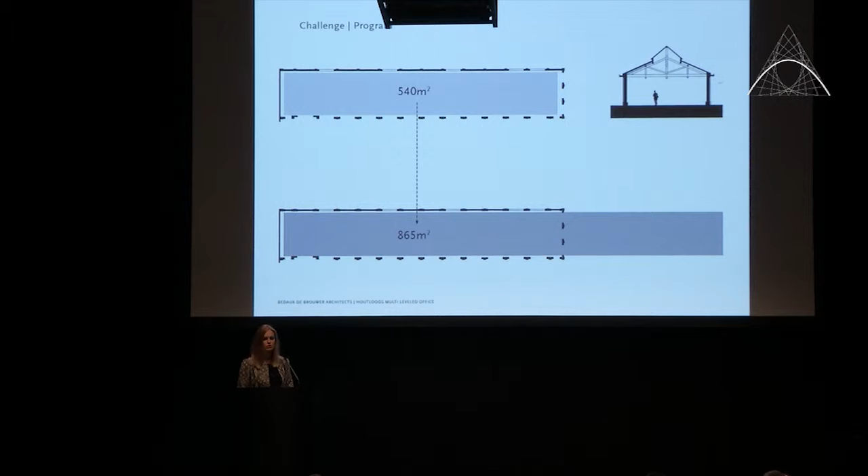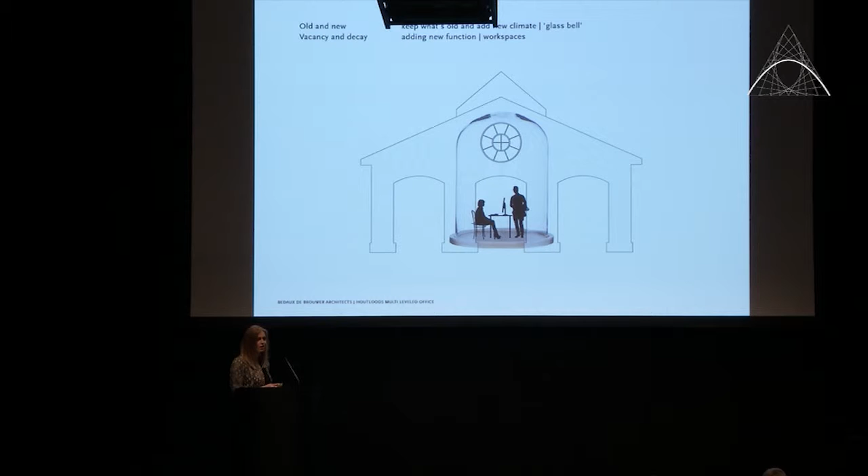So we have an old construction, this old building. How do we cope with all these challenges? Well, it's actually quite simple in a way. We add a new climate to it, like we put a glass bell into it, detached from this historical skin. Therefore, what is old, we keep old, and what we add new, we add as a new climate. Secondly, we add new functions into this new climate, into this glass bell, so to say. And then by stacking the program in a clever way, we try to come up with the program which the client asked for.

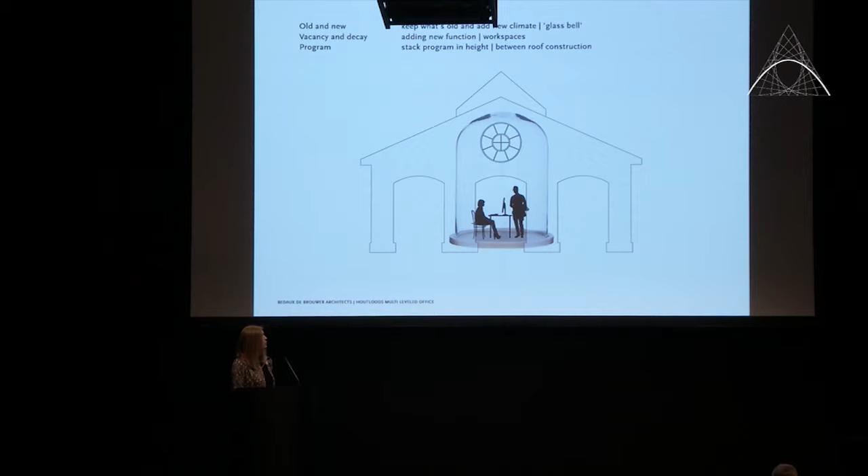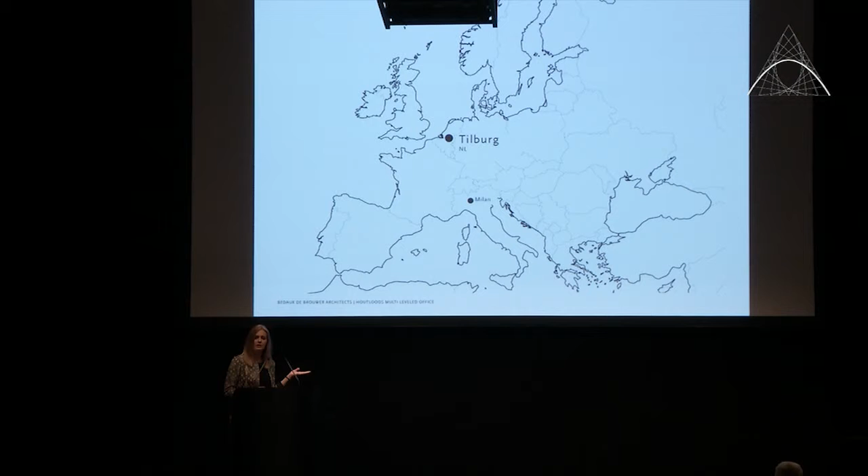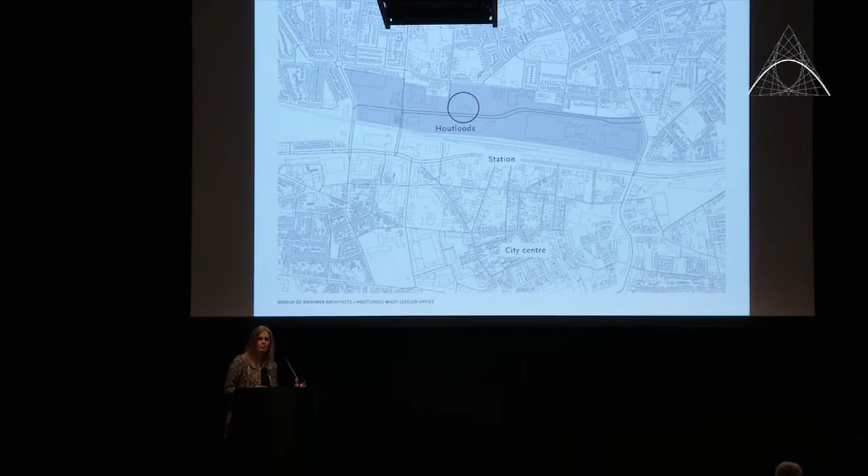So I first want to tell you a bit more about the urban context, because it's very important for this design. Like I mentioned previously, the building is situated in Tilburg, which is in the southern part of the Netherlands. If we zoom in on the city, you see in blue the old industrial area. Here, the Dutch railroad company had their workspace for the train station. It's near the station, which is still there, and very near the city center. So it's very central in Tilburg.

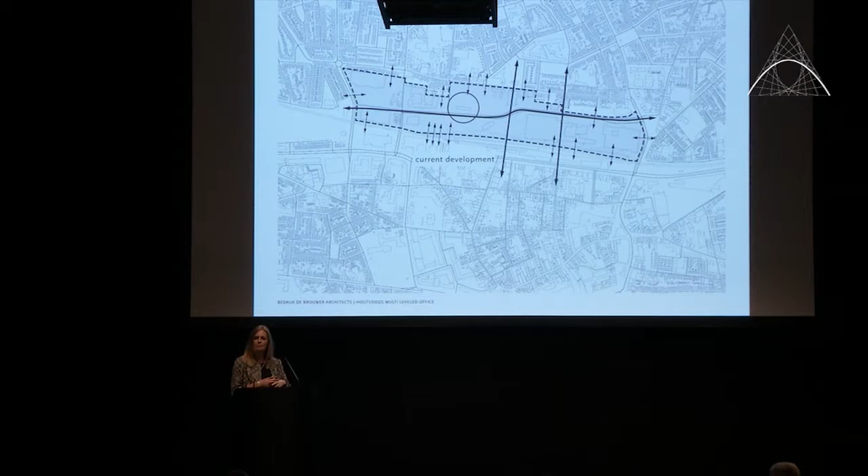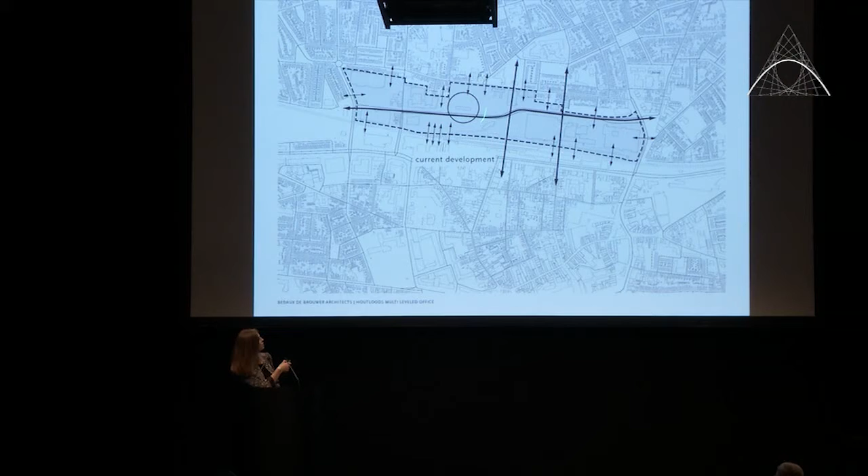But actually, for more than 150 years, the whole area has been closed off. So it's been a kind of forbidden area of the city. At this moment, they are opening up the borders, and they want to reconnect it to the inner city again. This transformation is actually the biggest development of this city in history. And as you can see over here, in the middle is the Houtloods, really in the heart of this urban development.

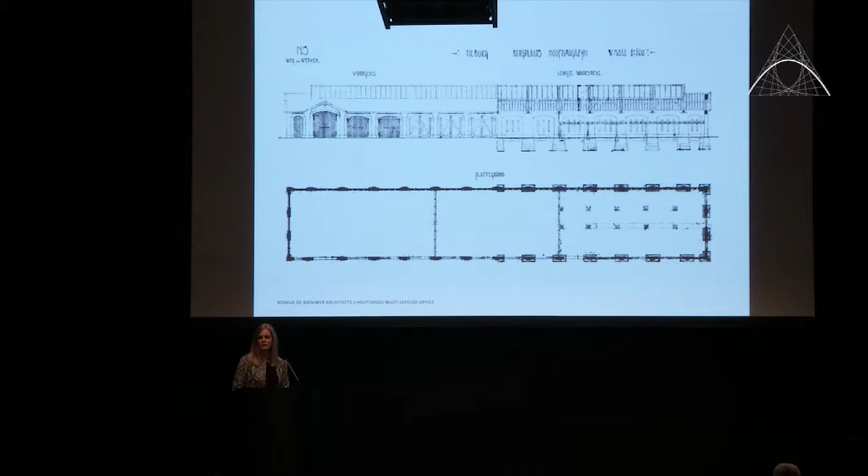Here you see one of the older drawings. Oh, I'm sorry. One back. Here you see the old drawing of the building. You see that it's a very specific object. It used to function as the lumber yard for the Dutch Railroad Company. The wood was stored over here to dry naturally. So the object itself is shaped by this function.

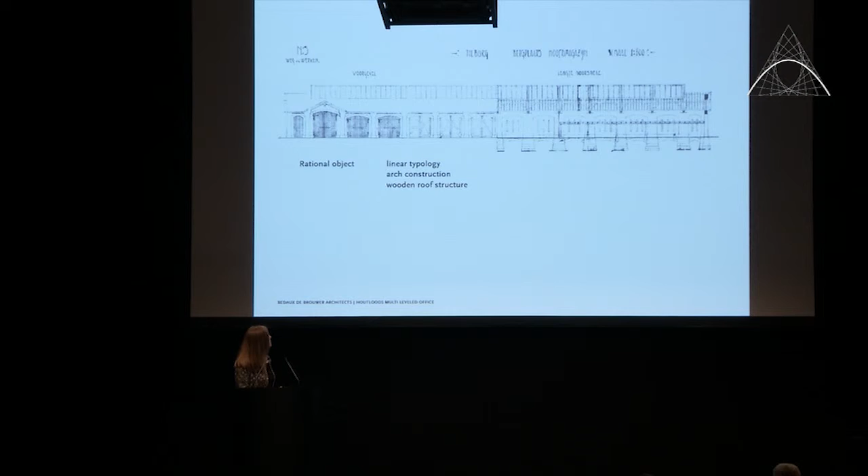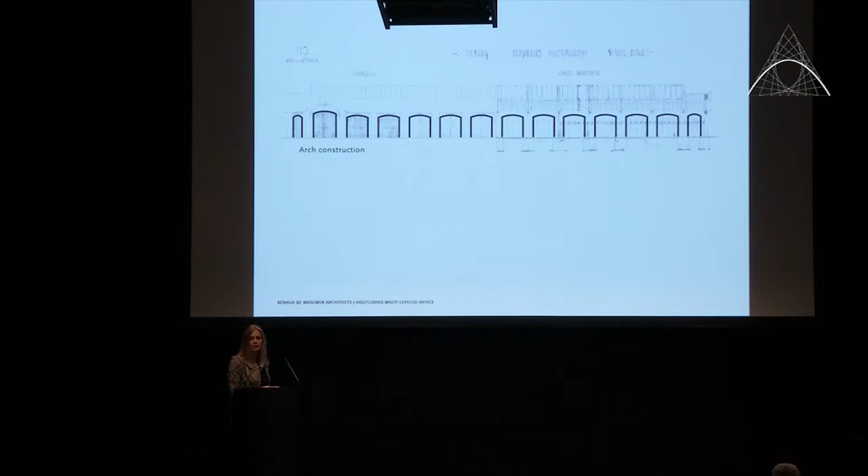So there are a few characteristics. It has a linear typology. It has this arch construction because the arches were open to let the wind blow through the building. And it has a wooden roof structure. And those elements we thought were very important to also consider during creating a new design for it.

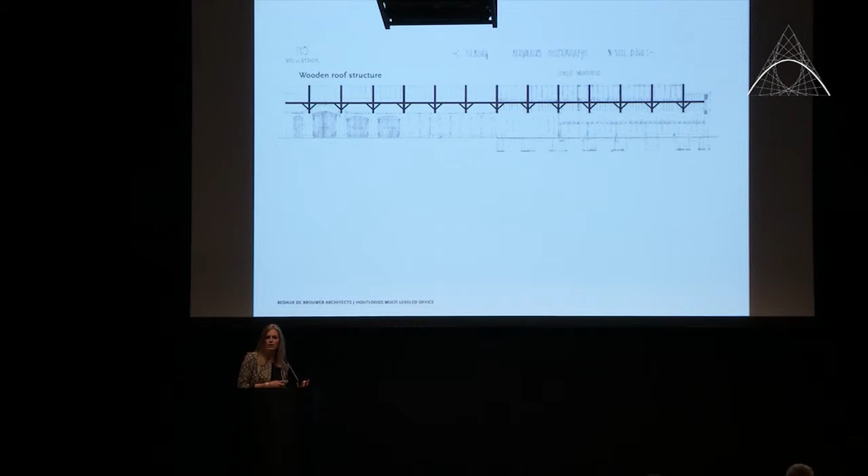Which brings me to the design. I mentioned previously, we have this old historical skin where we add a new climate into it. But first of all, we wanted to make this rational object visible again. So the facade, which used to be open, we opened it up again to make this structural, rational object readable again.

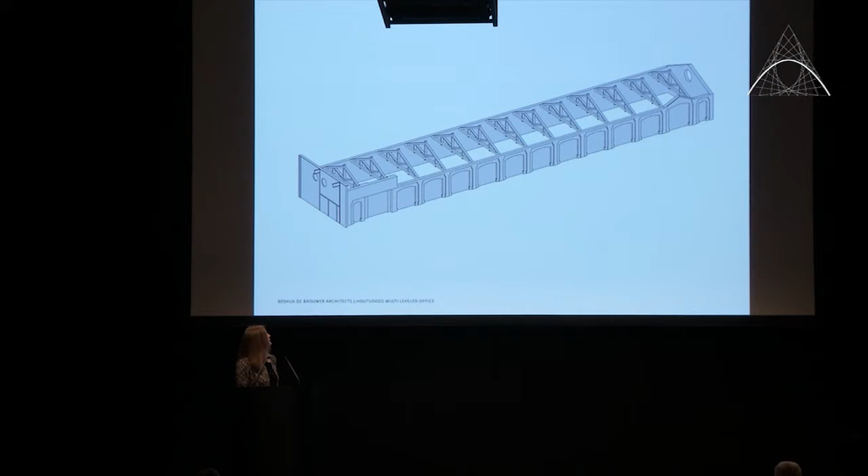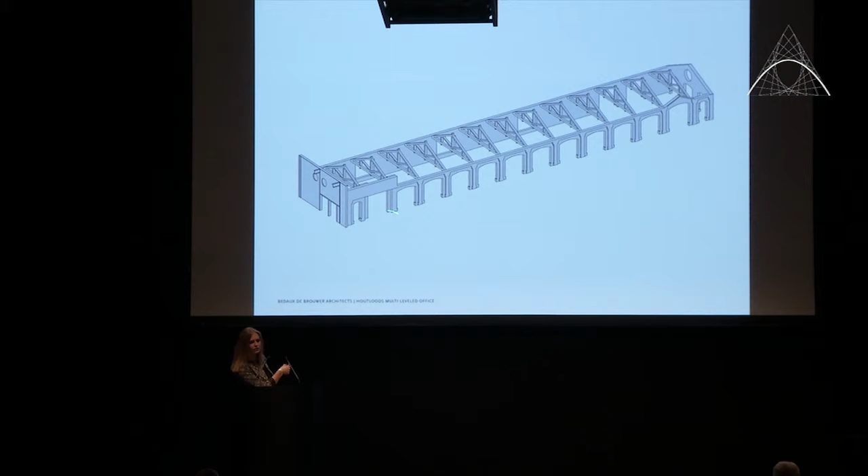So what you actually get is this construction over here. This is how the building looked before we changed anything. So the first step is to open the front facade like it used to be. And we added some new openings on the back facade because on the other side you have a lot of nice trees and a view on the church.

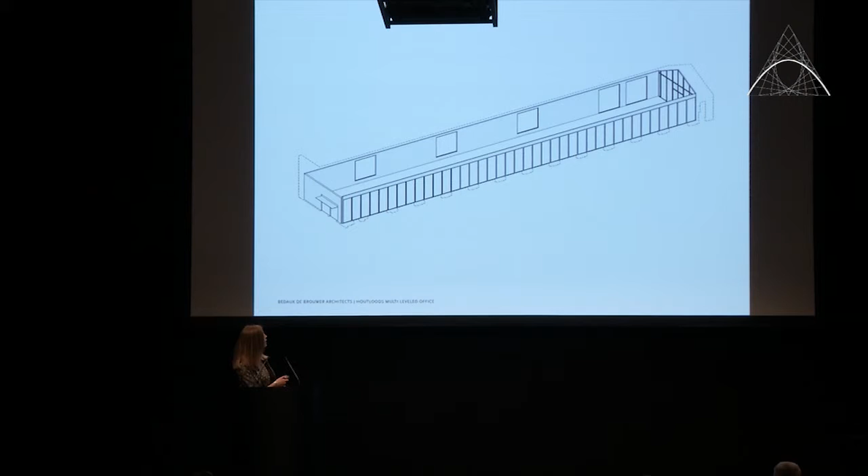The second skin is adding this new climate which I showed you with this glass bell. So we added a new glass facade detached from the historical structure. And then thirdly, we designed a furniture box, so to say, where all the facilities and all the users got their workspace.

So if we put them all together, you have three different skins. We are dealing with this historical skin, which you see over here, the old historical skin. Then we add a new facade. And then the third skin is this flexible box. So if the program changes through time, then this box can be rearranged.

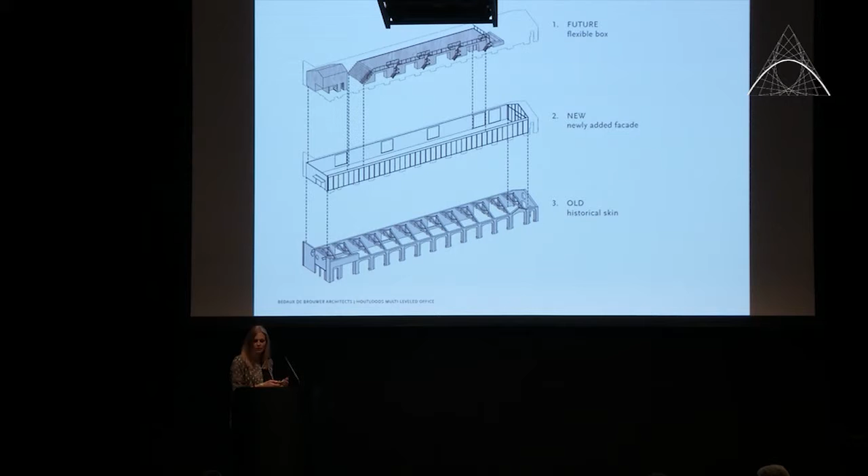And if you translate all these steps into the design, you get this section, which shows that this flexible box over here creates a first floor, so you have workspace underneath the floor and workspace on top of it. So you get different types of atmosphere to create these workspaces. And this is the section through the length.

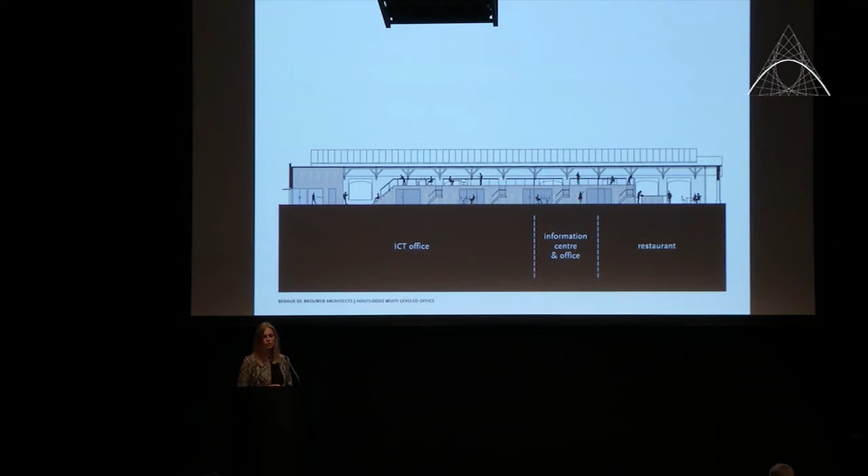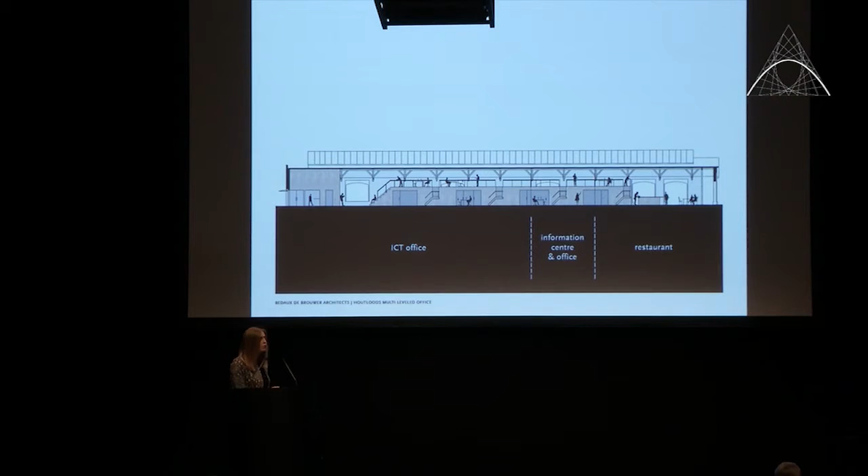And like I mentioned before, we have different users. So we divided the building into three divisions. It's an office for the ICT company. It's an information center and office for real estate agents. This information center is for the whole industrial area around it. And then there is this restaurant on the right. I will zoom in a bit so you get a bit more understanding how this works.

Here you see the floor plans, and what you see here very visibly is that you have this historical skin, this new added climate, this glass facade, and then the third layer is this flexible box. And by these floor plans I want to show you a bit better what kind of workspace we have actually created, because it's a mix of different types of workspaces.

First of all, we have the auditorium room where people can sit on the stairs over here, where they can have lunch or just work, and presentations can be held. Then on the ground floor, underneath the first floor, you have concentration workspace and space to gather. And like you see here, it's a more quiet environment. So you are a bit more isolated, so you have more concentration on your work.

And then on the first floor, above over here, you have more open workspace. And like I already explained, it was a very difficult task to stack the program, because we were dealing with this roof construction. So what actually happens is that people are working between the wooden beams. So you have a physical division between the different spaces, but you still can interact with each other.

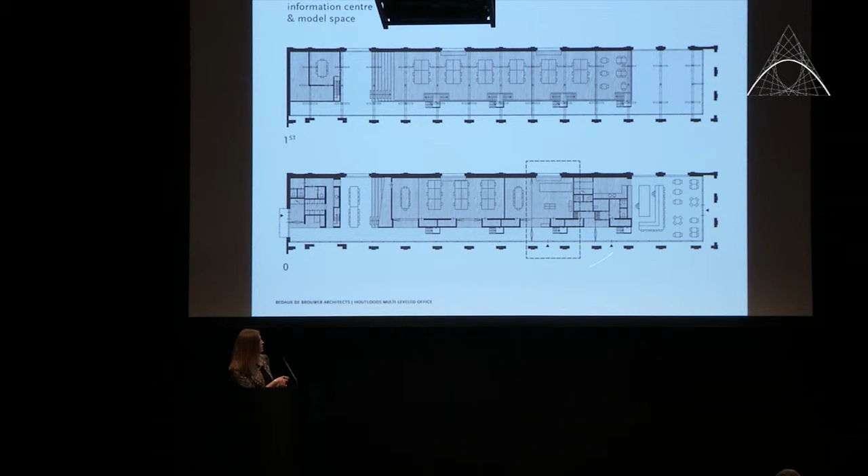And the funny thing is, while you are sitting and working behind your laptop, you only look at these wooden beams because they're at eye level, but when you stand up, you can have a little chat. And on the ground floor, there is a space for the information center for the industrial area. There are some models placed there, so people from the restaurant or other public can visit.

Then the restaurant is actually used for more informal workspaces. So if the people from the ICT office have clients, or they want to informally work somewhere, they can just have a seat inside of the restaurant.

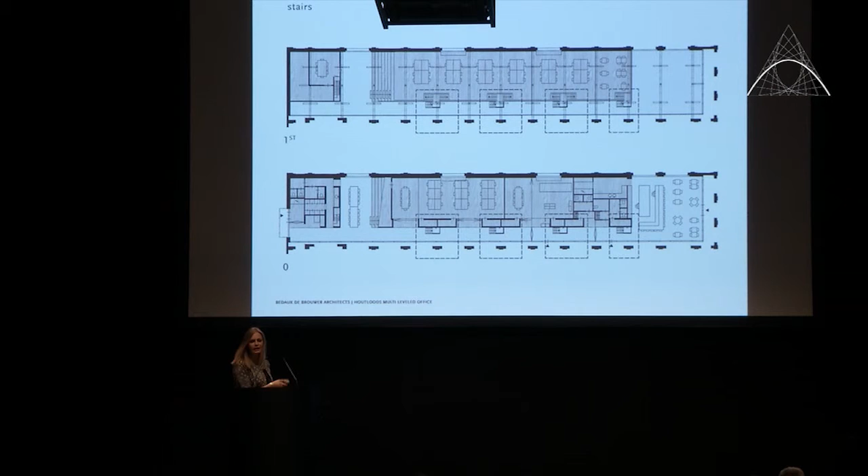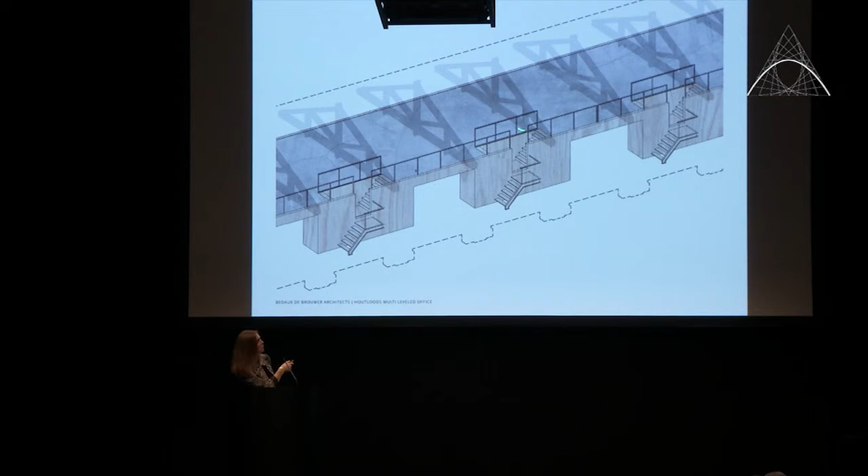And the stairs are a very important one to stack this program, because like I mentioned, the roof construction would be an obstacle if you would go to the first floor. And as you can see here, the stairs are going first in one direction, then you can choose whether to go left or go to the right, and you won't bump into this beam with your head. And this is how it looks on the outside.

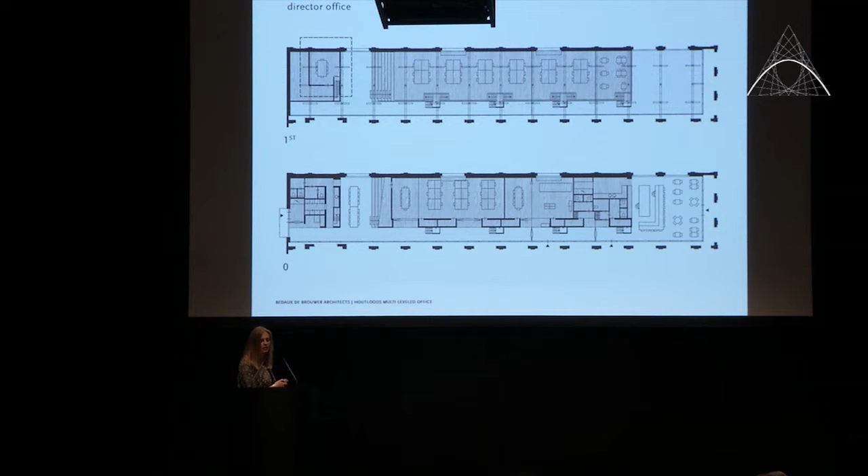There's a small office place in the back. It's a closed-off space because it's on the back facade, but it has a very small, tiny window, so the director who is sitting there can look at his staff, seeing if they are doing their job right.

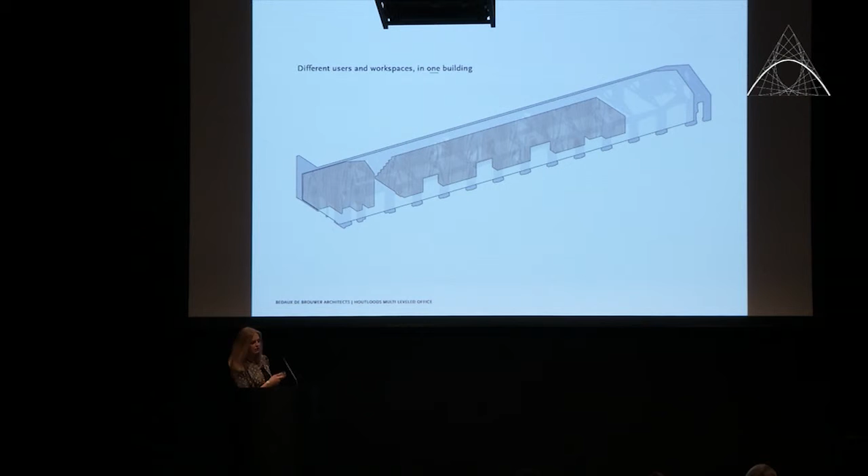So although we have all these different users, all these different workspaces as well, what was really important is that this building would also be experienced as one object, as one building. So how do we do it? One very important thing, we created this linear route between the glass facade and the furniture box. As you can see here, we have made this corridor, which is the main traffic. You can enter the building from one side and walk all the way through to the other side.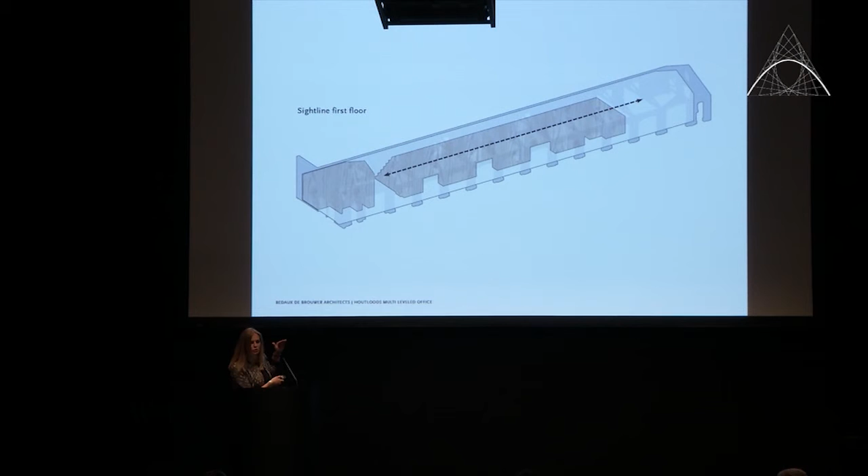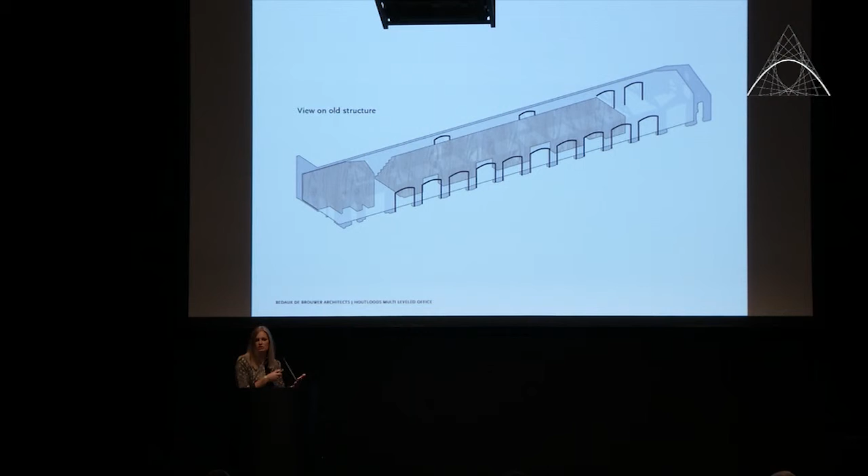This happens also actually on the first floor, but only in view. Because the furniture box is detached from its roof construction, you can also watch from the front all the way to the back as well. So you experience the whole building. And then we have this arch construction because the glass facade is detached from this historical structure, so you still have a look on the old brickwork on the inside. Instead of putting insulation there, you still see the bricks.

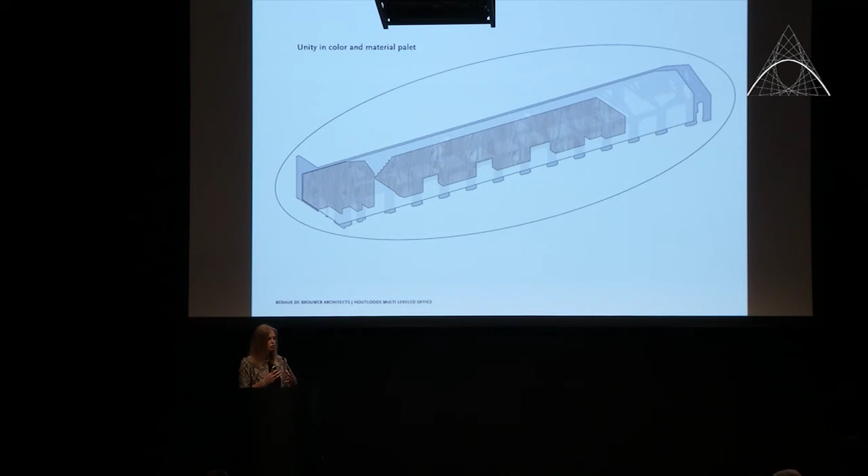Most important is also we are dealing with old and we are dealing with new, but we still also want to create a unity in its color and its material palette. So we wanted to be very modest, and we only used wood and gray tones and black, as you can see here. And you get an interesting tension between the old wooden roof construction, as you see here, and the furniture box, which is in contrast a very tight and clean design. So you get a tension between the two different materials. And you see here an overview from the restaurant.

But actually most important is not the design, but how it is used. And what I think is really interesting is that you can try to make a design which is experienced as one building, but in the end it also works like that because we have different functions. They are overlapping in program. So what happens is that all the users collaborated in the building process, but also now they are making use of each other's facilities. So in that case, they are exchanging their places as well.

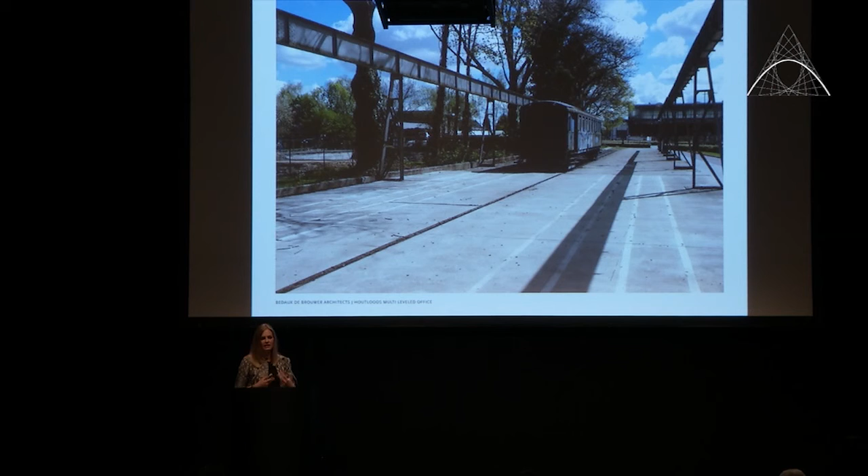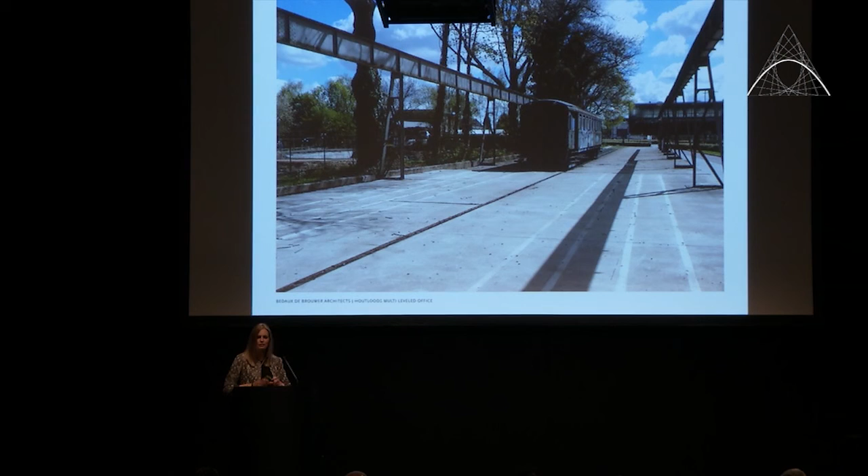And what also happens now, and this is really nice to see, is that it's also kind of becoming a catalyst for the whole area. It's still a very quiet area, but there are small interventions now created. This is an old train unit placed over there, and now during summer it's going to be a cocktail bar. So there are small interventions which are going to develop and make this area more interesting. And as you see, like I said, there's not a lot of activity yet. It's interesting to see that because of the overlapping program in the Houtloods, there is always light and there is always activity, and people are really going there quite a lot.

And I think in the end what is very important is that the urban scale, the scale of the building itself, but also the scale of the interior, we saw as one design task. It was one vision to deal with. And that's why I think, although the building is quite small in this very big area, it has had a huge impact for the whole area as a catalyst. So what you see is that it shows the old industrial story, its history, but it also shows where this whole area is heading towards.